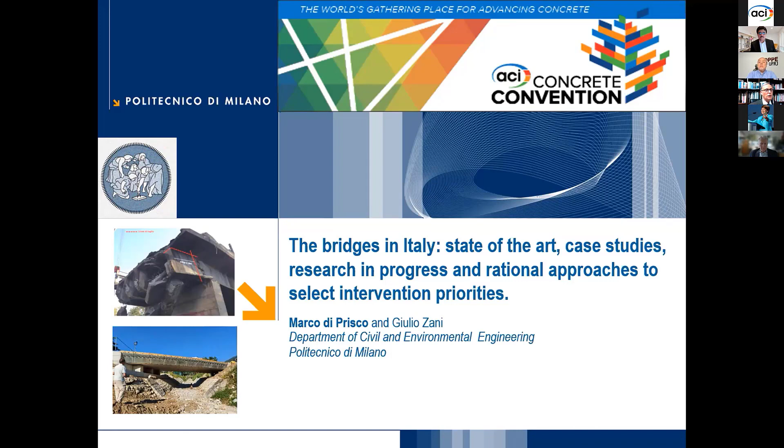The title of this short lecture corresponds to the outlines of my brief speech. I would like to sketch the Italian bridge situation, and then present 3 case studies, the research in progress, and a rational approach to select intervention priorities we are working on with the Politecnico and Regione Lombardia. In the last 9 years, we saw in Italy 9 collapses of bridges.

You could see that the collapses marked with the orange dots were mainly man-made hazard, while the other collapses were due to natural hazard.

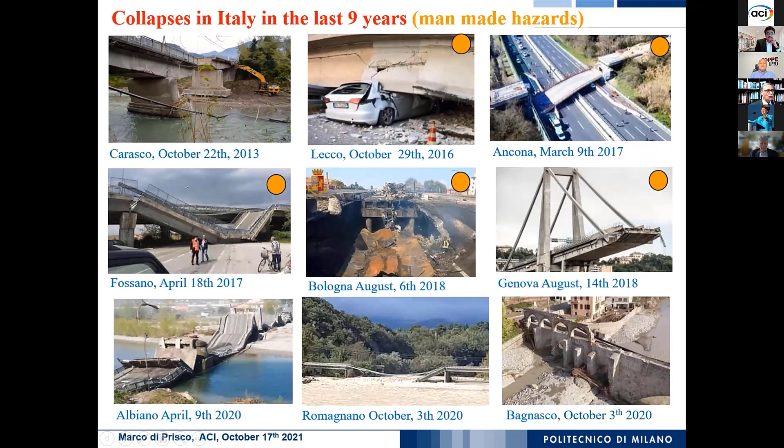If we look at a snapshot given to us and presented a few years ago by Philippe Yen at Politecnico di Milano, looking at the US highway bridges, you could see that you can have essentially 3 different categories: the yellow, which don't present any deficiency, the blue, which correspond to functionally obsolete bridges, and the light blue, which correspond to structural deficiency.

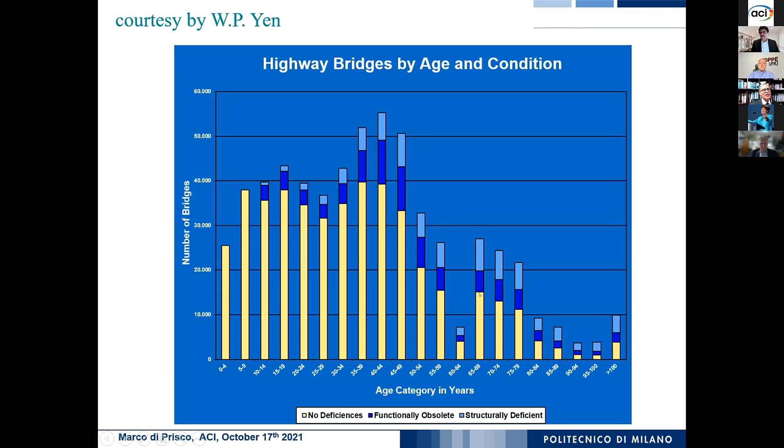You can see that when we pass 50 years, the ratio between the light blue and the total length of the bar becomes much more significant. This means that after 50 years, effectively, there is a strong need of control and restoration.

Looking at the bridge failure causes observed over 32 years from 1980 to 2012, we saw 1,062 failures over 600,000 highway bridges. You could see that flood was the most important cause, with about 28%.

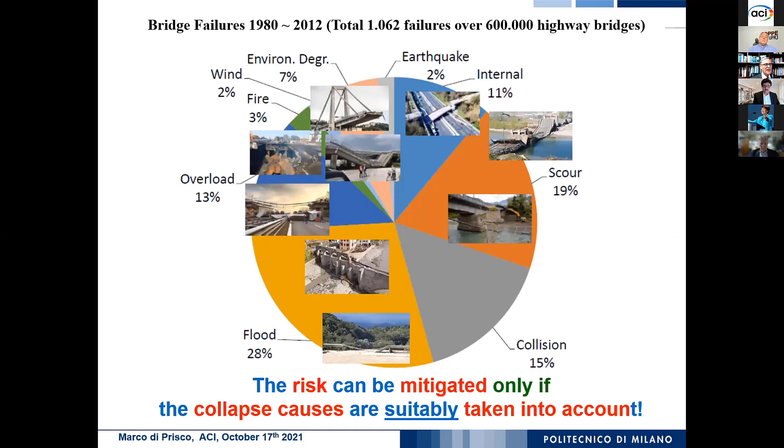If we look at overload, we count only 13%, while collision and scour were more, 19 and 15%. Internal causes, meaning mistakes in design or execution, count around 11%. All the others arrive at no more than 15%. Obviously, this means that the risk can be mitigated only if the collapse causes are suitably taken into account.

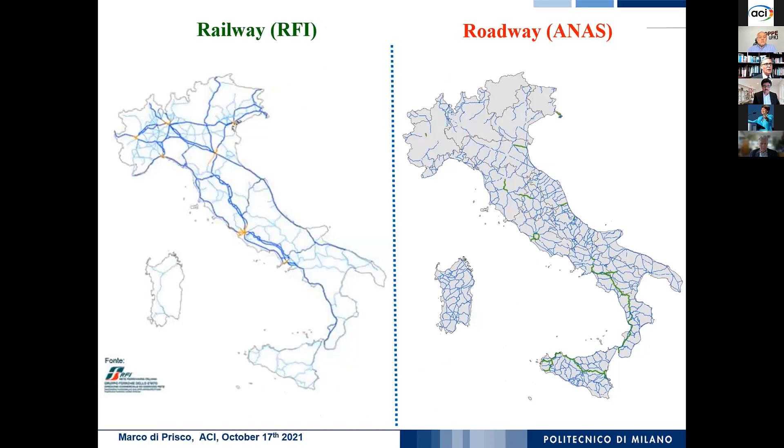If we look at the Italian situation, we have a huge difference between the railway system and the roadway system. In detail, we see that the railway system has around 21,000 kilometers against more than 800,000 kilometers for roadway. But the most important point is that there is one main agency, RFI, which controls 83% of the total net, while for roadway we have only one main agency, ANAS, which is able to control only 3.5%. That means a much more heterogeneous situation in the roadway system.

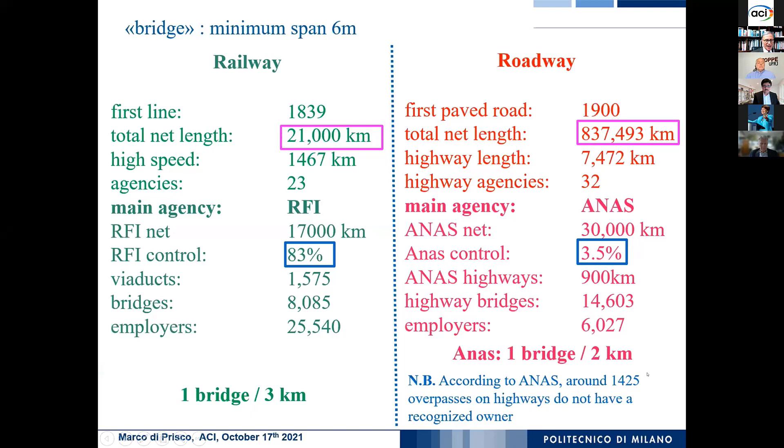Our geography causes a situation where you have one bridge every 3 kilometers for railway and one bridge every 2 kilometers for roadway. You could also note that a few years ago, ANAS observed that about 1,500 overpasses on highways do not have a recognized owner. So this is a main difference between the two systems.

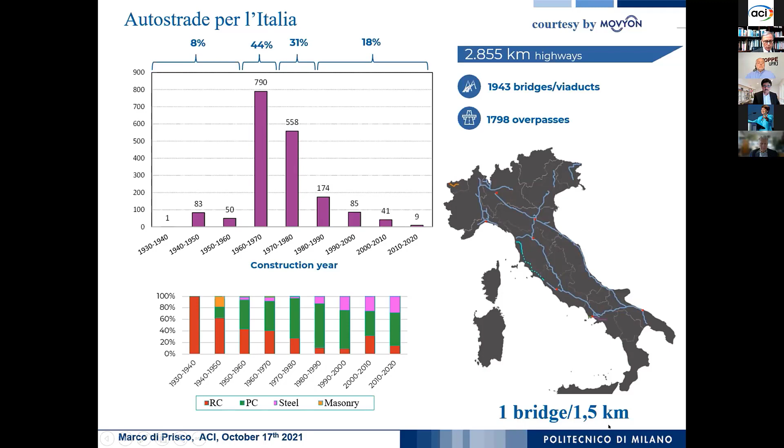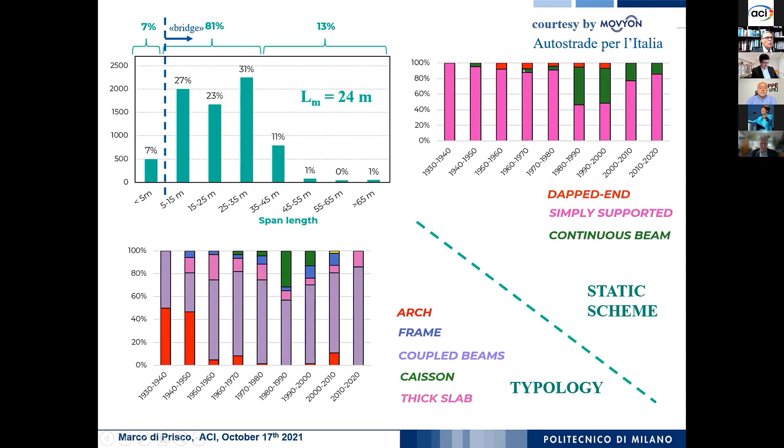About the static scheme, we have mainly a simply supported situation. We have continuous beams only starting from the 80s, and dapped ends that arrive essentially from the 60s to 2000.

If we look at the risk associated with different constructions, in a slide presented for the first time by Aurelio Muttoni in the FIB Symposium in Melbourne 2018, we could see that the failure frequency per year for a bridge is not so different with respect to other types of construction like dams, pressure vessels in ships, nuclear power plants, or even space shuttles or commercial airplanes.

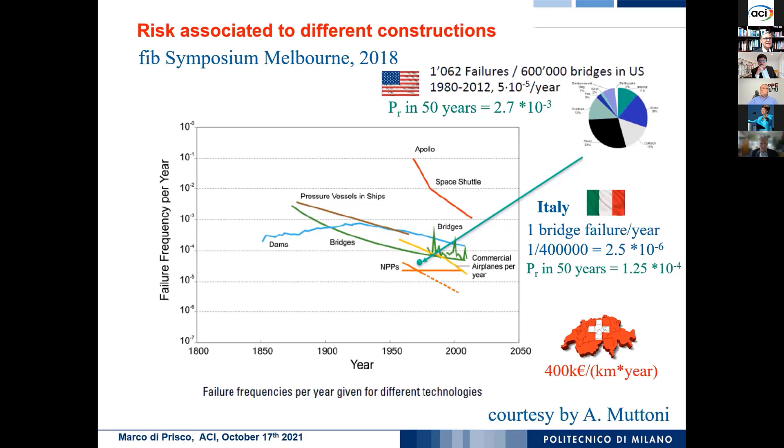And you could see that the situation as shown by Philippe was practically in the same range. If we had one bridge failure per year in Italy, we could be in the same range. What is very important to observe is that the risk is strongly associated with the amount of resources given for the maintenance of the bridge. According to Swiss computation for highways, highway bridges need about 400 thousand euros per kilometer per year. So it's much higher than what we did in the last year in Italy, about one order of magnitude.

Let me speak about three case studies that I had the chance to examine in detail. The first one is a very old bridge, Azzone Visconti, built in the 14th century. It is probably the bridge that was painted by Leonardo da Vinci in the famous Gioconda. This type of bridge is a stone bridge, and there are also some portions built in the 50s made of reinforced concrete. The second one is Mella Bridge, built in the outskirts of Brescia.

It's perfectly functioning. It is post-tensioned, cast on site, and has a global length of 42 meters and 3 spans. The final one is Annone Bridge, built in the 60s, and it failed in 2016.

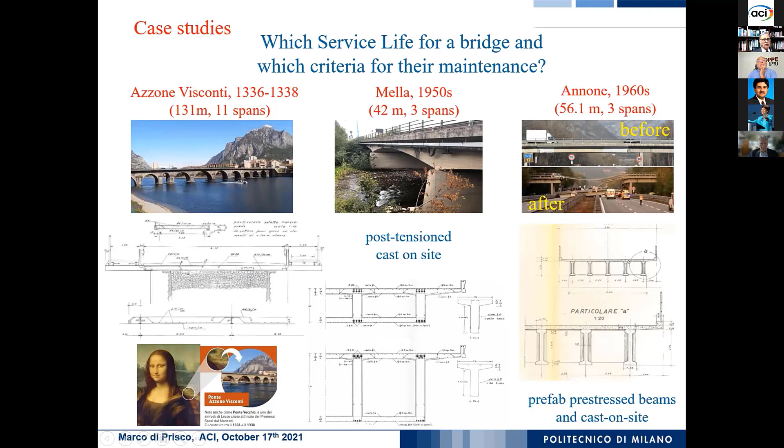You see the picture before and after the collapse. It was built by means of prefab beams, pre-stressed, and also cast-on-site concrete for the top slab and the diaphragms. Well, looking at the first bridge, we were able to see which uncertainties you could have in the analysis of ancient bridges.

As obvious, this type of bridge was built and rebuilt over a long time, so the historical situation and presentation is very, very important. You also have the possibility to analyze very well the soil, because this very stiff bridge depends a lot on soil movement, and we did a careful investigation on that.

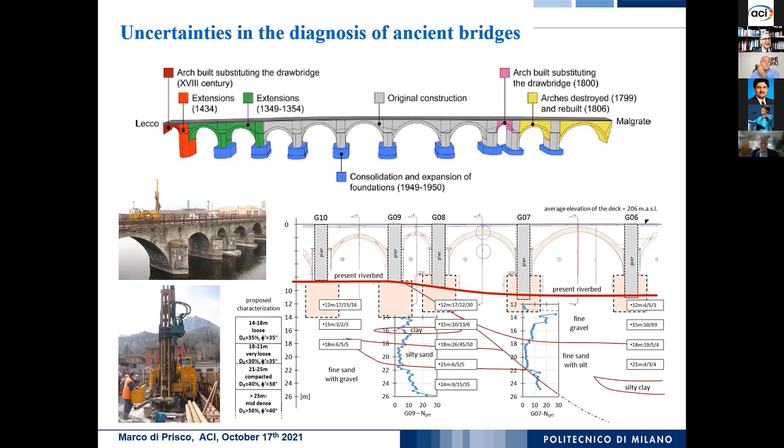We analyzed the bridge essentially because we aimed to compute the bearing capacity of the bridge by means of three steps: the advanced diagnostics, the controlled static test based on a 2D model, and then the control of the 3D model by means of dynamic test to control the stiffness. All the information, even concerning the degradation of the bridge, was collected in a BIM model.

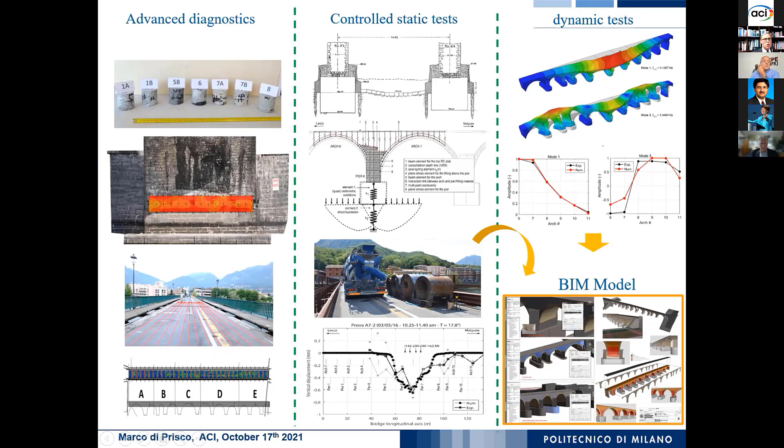The Mella Bridge was a lucky bridge because it is in good condition, and for it we have at our disposal the original design report, original technical drawings, photos, inspection reports, and also a last inspection done about 5 years ago. This is a very lucky condition, because if you compare with other bridges in Lombardia, we have only 67 out of about 300 bridges in this condition. All the others, you could have a much lower amount of information.

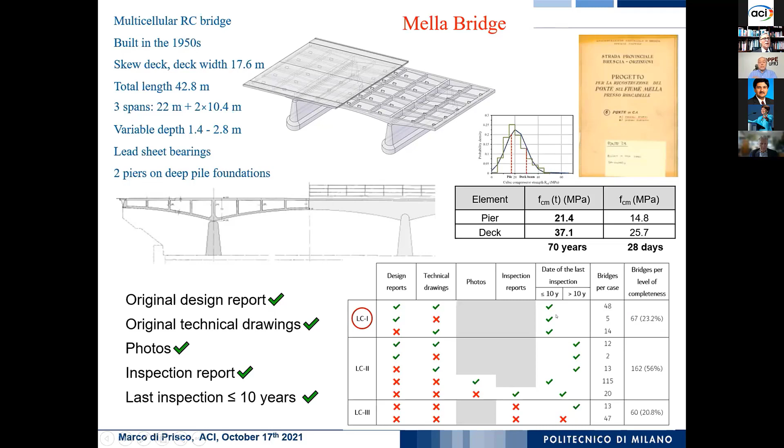This is comparable to what we observed when an exceptional load of 380 tons crosses the bridge at the center, along the longitudinal axis of the bridge. You could see even here that you had around 1 millimeter. So this incredible amount of load produced essentially the same displacement, which was not exactly what we computed by means of elasticity, because in elasticity we had only 0.77.

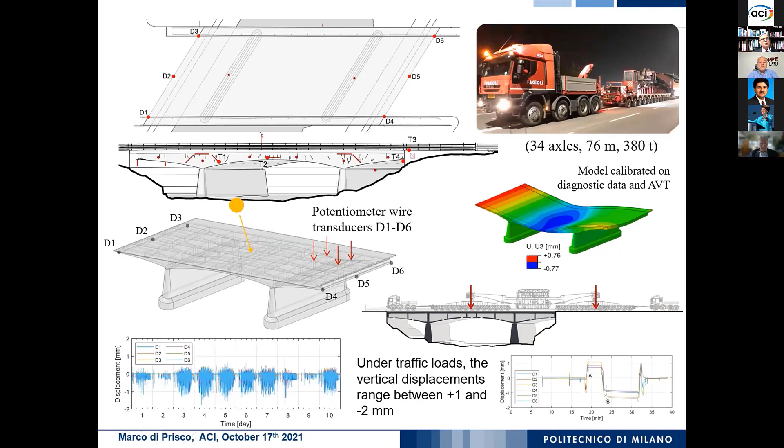What is important to observe here is that even in this situation, for a long time, the bridge was crossed by exceptional loads, believing that you had 7 beams, but in reality you have only 6. So there is a huge difference between as-built and the original design. And also carbonation represents a problem, because we don't know how carbonation could evolve in the future.

The last bridge is Annone Bridge. It collapsed, and the balance was 1 killed and 3 injured people. It collapsed when a truck of about 108 tons induced a hole in the middle span. You have to consider that this load can be compared with the total load of the middle span, which is about 172 tons. That means a huge load with reference to the dead load.

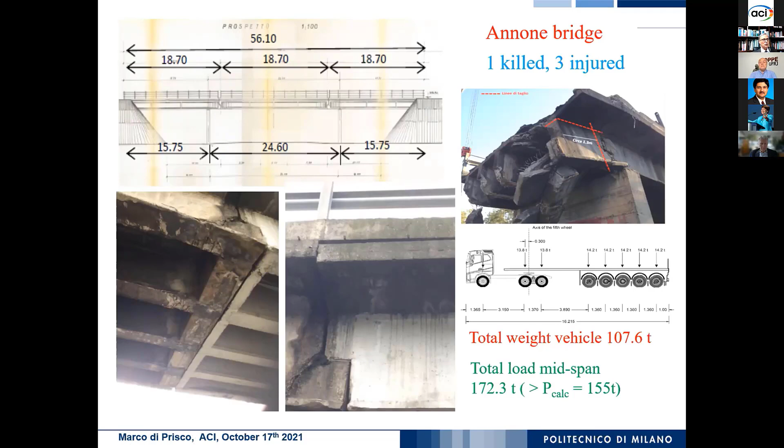It's important to say that the bridge is a 2nd-class bridge, designed to bear around 36 tons. But in reality, for about 7 years it had 108 tons. So it was essentially able to resist for a long time.

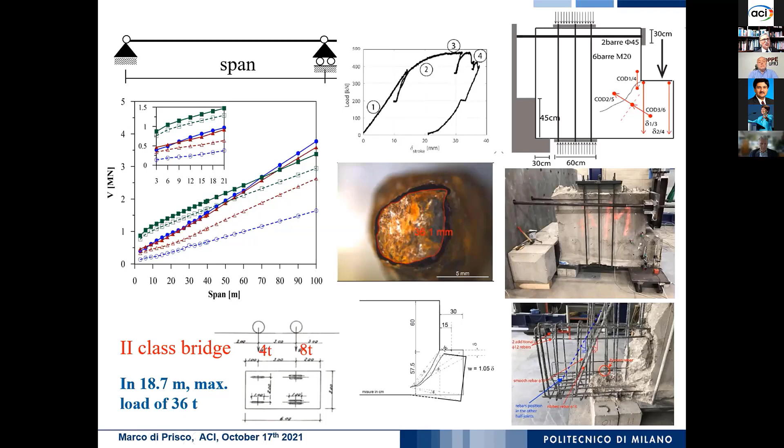It's important to say that also in this case there was a small mistake, but the as-built situation actually increased the safety of this bridge, which was a reaction to this very important collapse that was strongly observed by media, and also after 2 years, the impressive collapse of Morandi Bridge.

The reaction was a project in Region Lombardia with our Politecnico immediately after the Annone collapse, and then a strong increase of yearly budget for bridge maintenance, about 1 order of magnitude after 2016. Then there were national guidelines issued by our Minister of Transportation in 2020, and recently also a strong collaboration with the Minister of Transportation on a National Research Project.

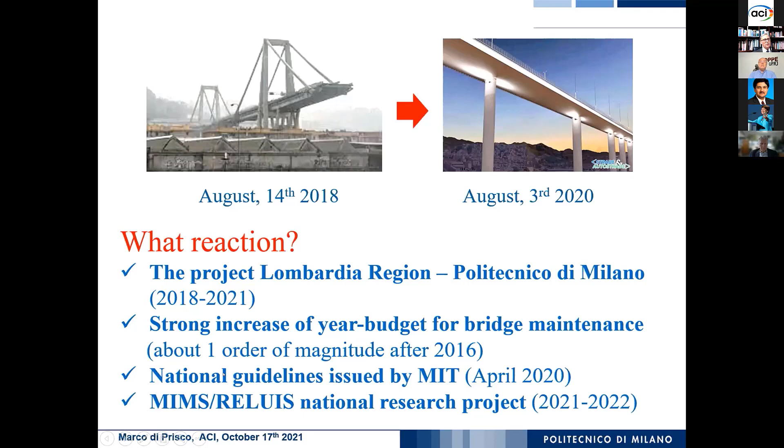The name is RELUIS, which corresponds to the first time there is a strong connection between the minister and a research team of universities, about 22 universities. The global amount of money was, over 2 years, 15 million euros.

With these guidelines, there were 4 different levels of attention fixed, starting from the simple census of the infrastructure, to the preliminary evaluation of the infrastructure, and to the accurate verification.

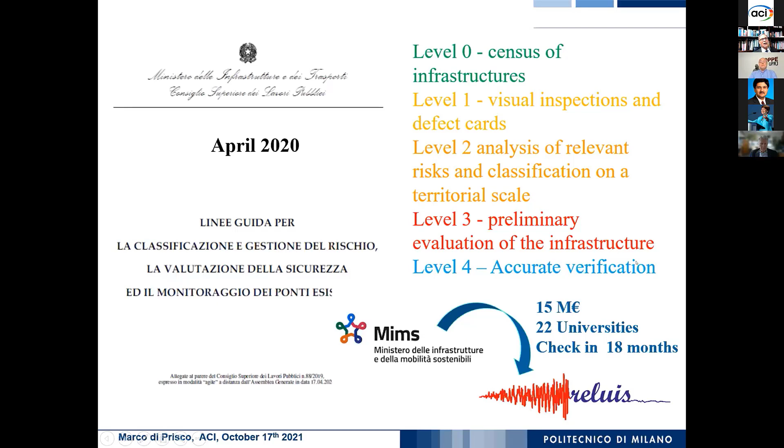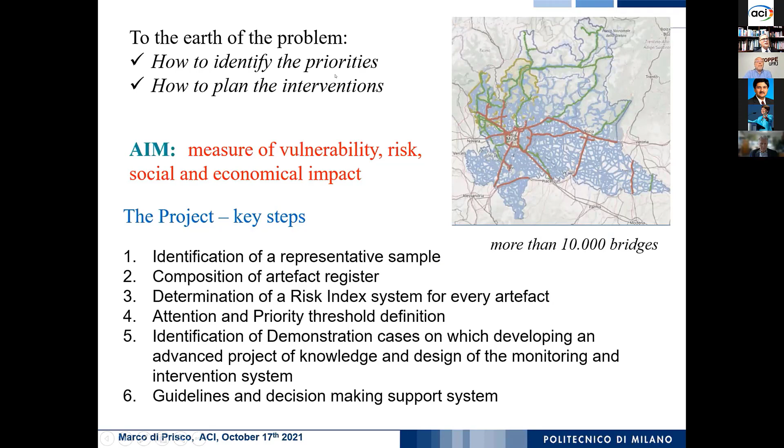In the Lombardia Politecnico program, we went to the heart of the problem. The idea was to identify the priorities, to plan the interventions. And we presented a bridge identity card with about 90 data entries.

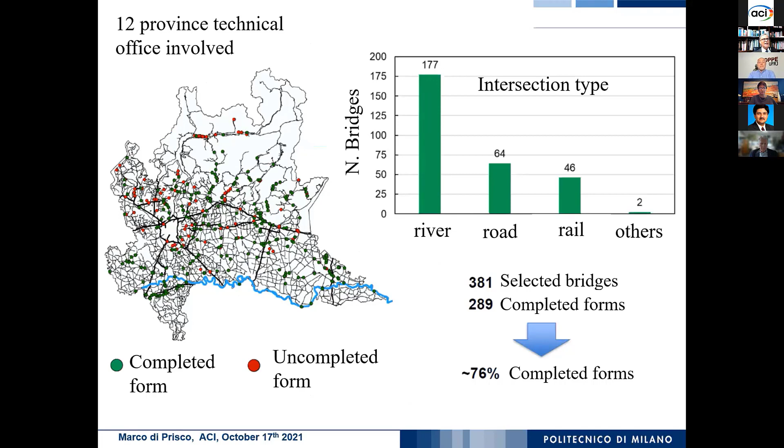We worked with the 12 provincial technical offices that appeared very heterogeneous, and we were able to complete only about 76% of the total bridge selection set. We also found a prevalence of RC and PC average span with respect to others.

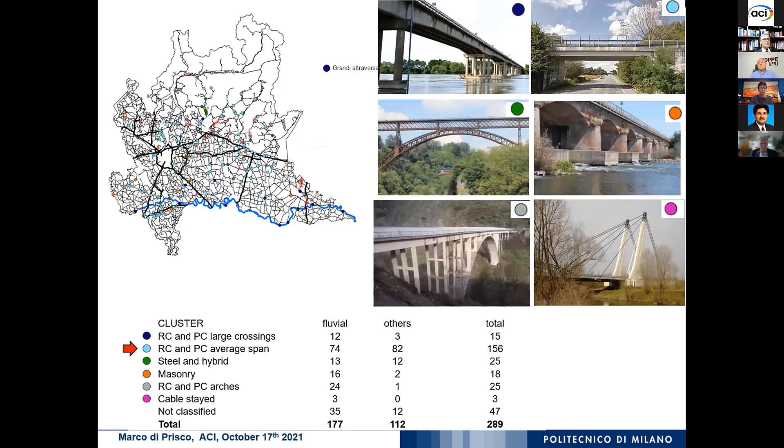We tried, starting from the technical description of the structure, the technical features, the historical data, the hydraulic data which is very important, the functionality data and the exposure data, by means of elaboration, logical and algebraic operators with calibrated rules based on expert judgments, to fix 4 levels of attention.

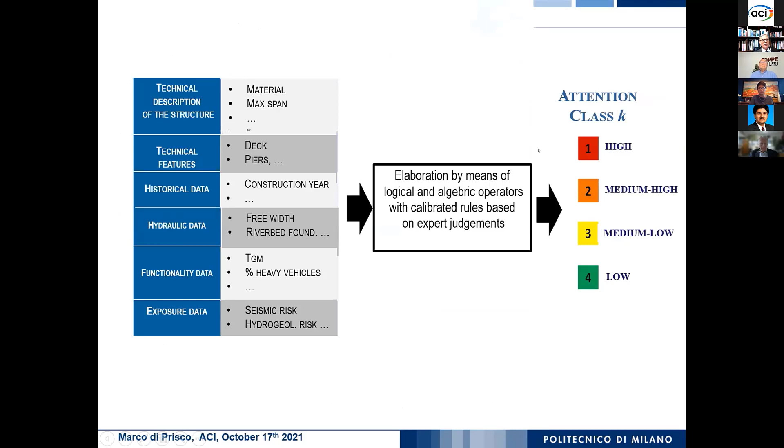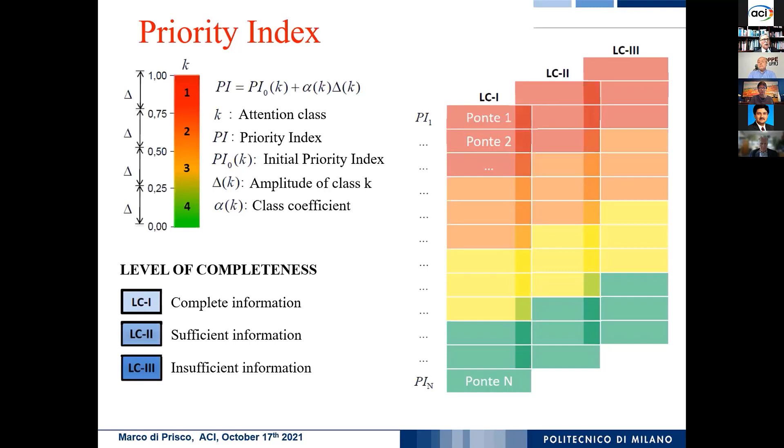The 4 levels of attention were also completed with a separate set of levels of completeness, which is very important because the data we have are only documentary data, and they are not absolutely homogeneous. So we need to distinguish between these 3 levels of completeness.

At the end, we tried to correlate the functional priority class with the technical priority class, and we arrived at 4 different classes that start from the urgent need of reclassification to the regular inspection activity, passing through the need of reclassification or even inspection priority.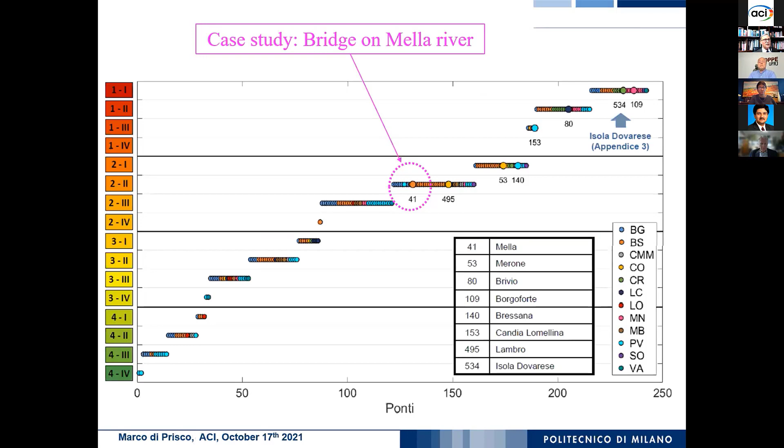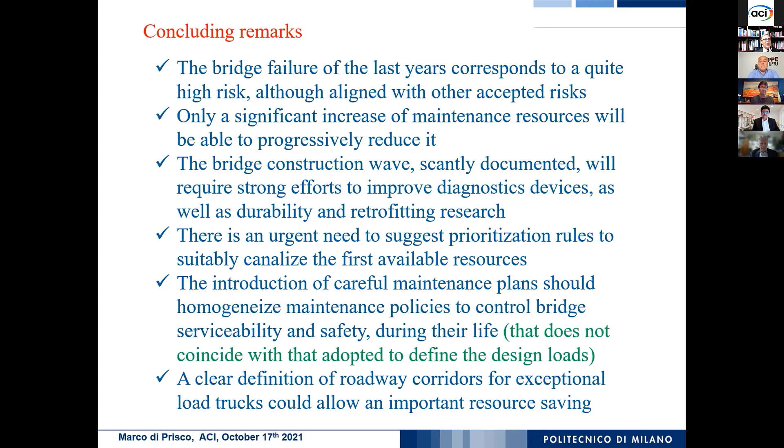I would like to remark that the cost increase due to the introduction of this durable material corresponds to around 5% more than without it. If we compare this cost increase of 20 euros with respect to the maintenance cost, it corresponds to only 3 years of maintenance cost. Thank you for your attention.